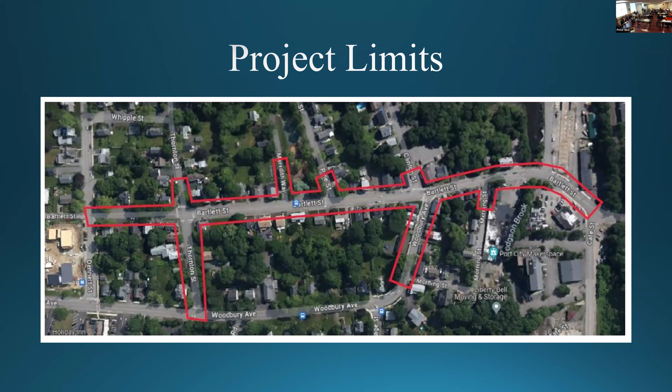So how did we get here? Many of you have been involved in this from the start. First off, we identified some needed upgrades in the Bartlett Street area. Then we had multiple public input meetings where we got your input on how you'd like to see your neighborhood come forward as part of this project. We had three input meetings, and we did have some traffic calming trials last summer. Then we took those and went to final design, went out to bid in February, and here we are ready for construction starting in the spring of this year.

Project overview: this project's main purpose is to replace the underground utilities—mostly water and sewer. The drain portion is only a small portion of the work because the existing drainage system is in good condition. The extension of the drainage is in order to deal with some sewer separation closer to the Thornton Bartlett Street intersection. Then it transitions into a roadway reconstruction project where we're going to be rebuilding the road and then new sidewalks. The purpose of the new sidewalks is to get back up to our city standards so that we can now plow the city sidewalks.

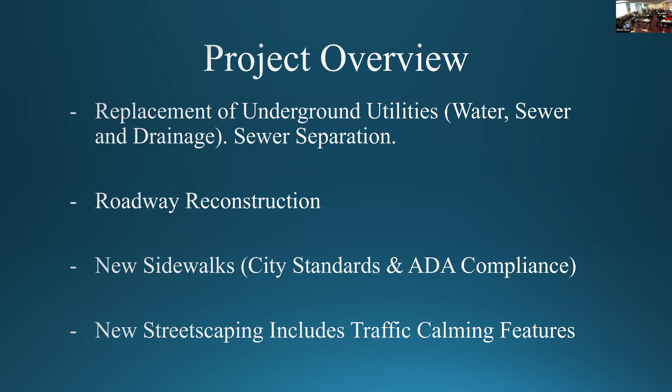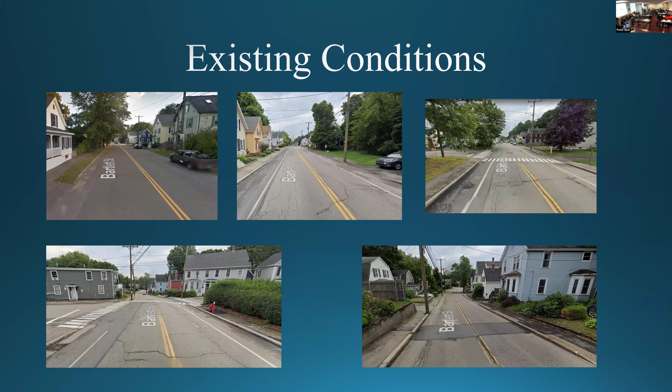So there's just a couple of photos of existing conditions. You all, I'm sure, are aware of what your street looks like, but these show some of the situations I was talking about with the sidewalks, with the fire hydrant in the way so the city plow can't come through and clear snow there. There are some areas of poor drainage, things like that. So those are the existing conditions of Bartlett Street, and this next one is Thornton as well—it's very wide, with some drainage concerns there.

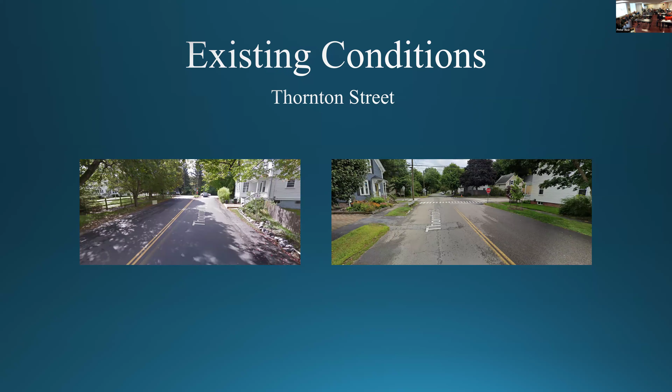As we've presented multiple times, our proposal and what the design ultimately became is narrowing up the street, as part of one of the features for traffic calming, to 32-foot wide, and allowing parking on both sides. This allows for essentially a 16-foot travel lane when there's two vehicles parked, and then you have the self-regulating alternating traffic that will help slow things down. In this scenario, we also have sidewalks on both sides.

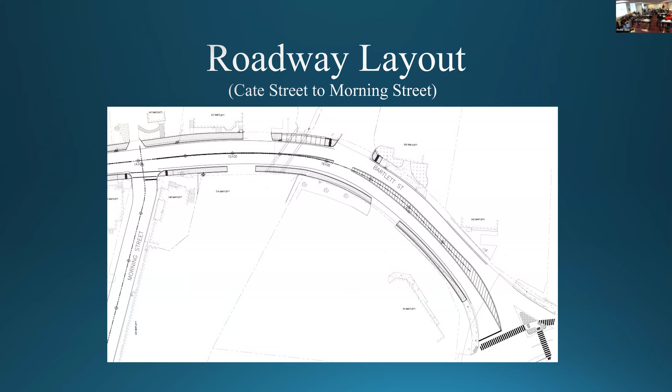These next few slides are just going through what's on the paper, the roadway layout from Cate Street to Morning Street, where we're extending the sidewalk, which currently is just a cow path through this area. Actually, there's no sidewalk, so we're widening the sidewalk in front of the auto repair shop, bringing it through so it's continuous on this side of the street. That's pretty much it for this area, there's no underground utilities there.

From Pine Street to Thornton, what we've installed as another traffic calming feature is the crosswalk at Pine Street. We're narrowing that section with bump outs to 20 feet wide, and the crosswalk itself will be a raised crosswalk, essentially a speed bump at that location. Similarly at the next intersection with Thornton, the road goes from 32-foot down to 26-foot wide at the intersection to help throttle that down and slow down traffic at the intersection. That intersection itself, which I'll talk about in another slide, still has some options for additional traffic calming that have to be decided on.

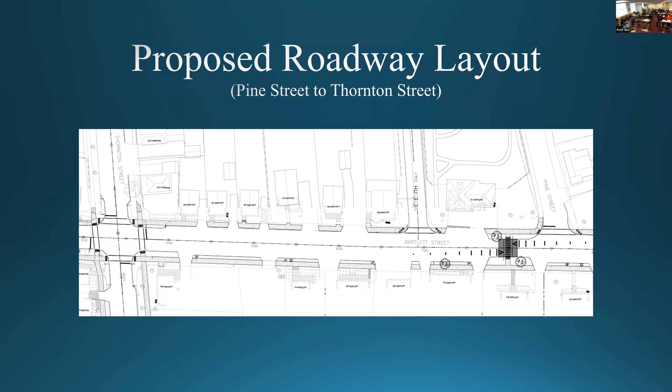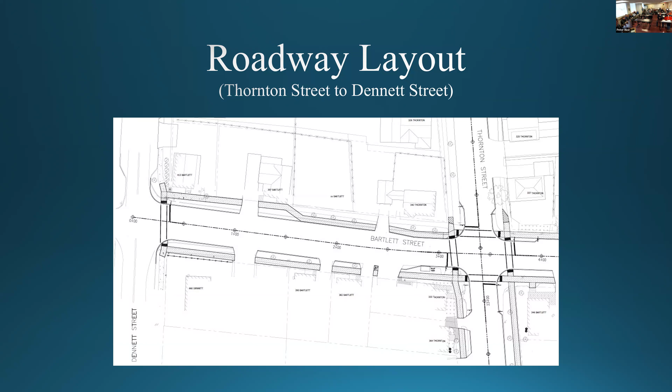Thornton to Dennett Street, very similar, 26-foot wide, then going back out to 32-foot wide to have street parking in that area, again to help with sight lines, throttle down that intersection so that people aren't just coming down Thornton Street and making that right-hand turn, because it's so wide open it's so easy to make a turn like that.

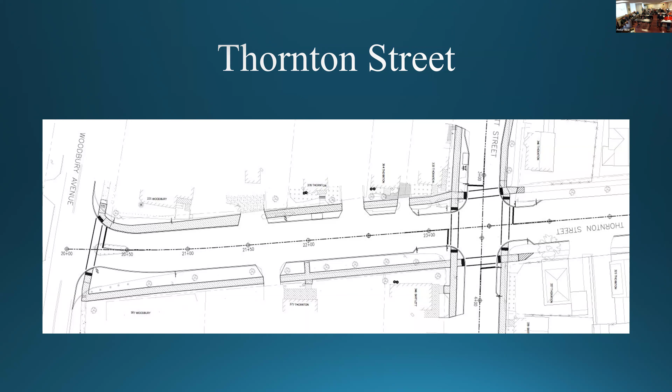This is the still-to-be-determined traffic calming feature at the intersection of Thornton and Bartlett Street. In this scenario, which we put in as an add-alt, we'd be putting in a raised intersection with a two-way stop, so Bartlett Street would not have the stop signs, Thornton Street would. That will be going to PTS for discussions and approval in the future. This is most likely our preferred choice instead of the four-way stop, but it has to get approved before we can execute that at all.

Now we're going to talk about time frame, how the construction process is going to go. For the first stage, we're looking at construction starting near the Hodgdon Brook area up to about Pine Street, give or take. That utility work will be the first stage, then it'll go into the second stage from Pine Street to Dennett. In each of these stages, it'll look like we're digging in the same spot multiple times, because the way utility work is done, we start with the lowest utility first, which will be sewer. We'll come through and do the sewer main, then come back and do the water main from start to finish, and then drainage start to finish. We'll be coming back and forth multiple times, and then we'll tie into all the services at the end of each one.

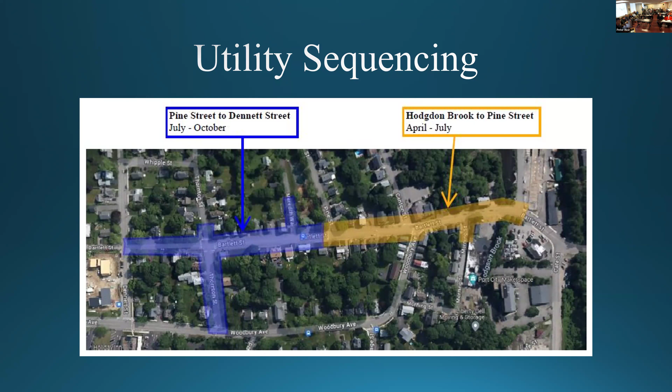After utility work happens, then we get to put the street back together. That'll be kind of the same phase sequencing, starting in this area and then going to this area. So generally speaking, utility work's going to be going on in this area in July through October, and in this area the street's going to start getting put back together, working our way up. I believe they'll have a second crew come on around that July, August timeframe to start putting the street back together.

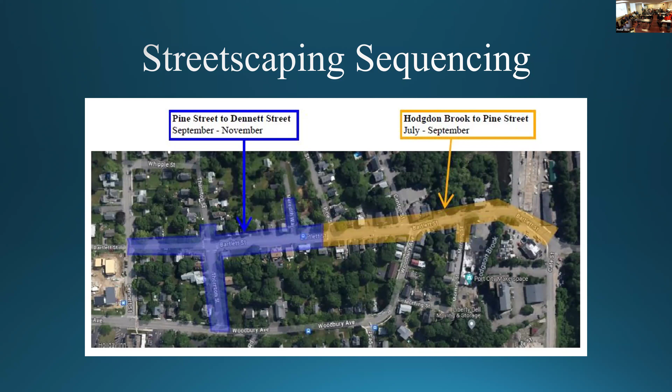Utility connections: one of the first things we're going to do is request access to basements to identify where your utilities are coming out, the depth, size, piping, and especially to identify if you've got galvanized water services. That's one of the first things we want to identify, so it's highly recommended that if you do have a galvanized water service, it gets replaced with the industry standard of copper.

These water lines were put in in the 20s, give or take, and they're really right at the end of their life expectancy. If you have a pipe going through your basement wall with threaded connections like the ones shown on screen, that's a galvanized steel water line, and they rot from the inside out. You don't even know your pipe's about to blow out until it happens, and then you have no water and have to hire somebody to dig a gigantic hole in the street, and it's not cheap. So if you have a pipe like that, let us know sooner rather than later. Go downstairs, look at where your water meter is in the basement, and check the pipe between the water meter and the foundation wall. If it has threaded connections, please reach out to us.

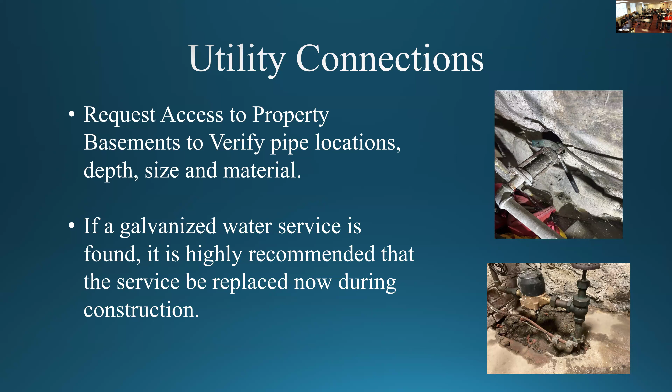On top of that, some more information on your utility connections or services to your houses: each of the utilities - water, sewer, drainage - we will be replacing essentially from the main to the property line or backside of the sidewalk, give or take, since they're very close to pretty much the same location. That's part of the scope of work the city's undertaking as part of this project, from the main to the property line.

And drain services, which is a new thing for this area since I don't think anybody really has drain connections, are going to be put in to the property line as well. This is to pick up sump pumps, gutters, things of that nature - things that you should not be putting into the septic or the sewer pipe. Once those get installed to the property line, you'll be able to connect into them. You'll just need to contact the city and get a permit for that connection, but the idea is to get all that surface runoff, sump pumps and things like that, utilizing the drain lines and not the sewer.

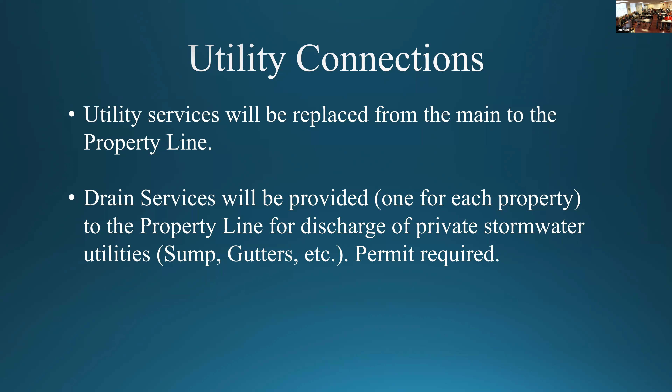The permit is more just for tracking purposes - we just want to know where you put it in, what you're connecting into it, so we have a good account of what's up. Those will be capped, and it would be your responsibility on the private property side of things. If there are any ponding issues, these are great for resolving those kinds of existing issues before we go into the sewer, just going into the street.

We'll work with each of you on your individual property locations, because typically what we like to do on a drain lateral is find the lowest point of your property and come in at that corner, but that may not be the most appropriate corner for you. Maybe your sump pump discharge is on the other side and your roof leader or gutter system is on the other side, so we'll work with you to get the proper location that works best for you. This is just a pictorial of what we discussed here with the typical water service, water main.

This is where the property line is, and generally in that area is the water shutoff. This is what we're going to be replacing. If we identify that this section here is galvanized, we're going to highly recommend that you replace that sooner rather than later, because from there on would be your responsibility.

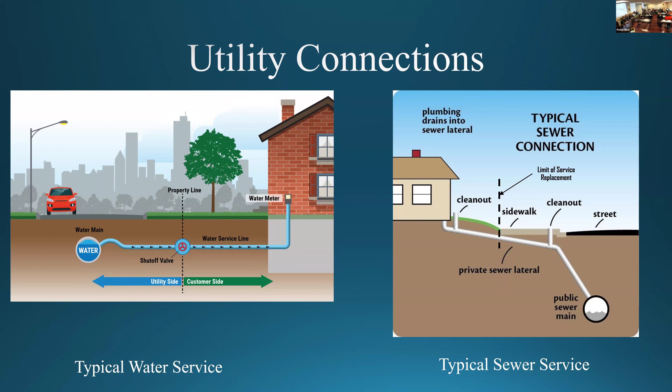Similarly, this sewer main connection here, there's the main. We're going to come up right here, give or take, is the property line about on the back of the sidewalk. So we're going to be replacing from this point to the main. We'll have a clean out so we can do our testing, but you would be responsible for anything from this point to the house.

Okay, so the other concern is access during construction. Some of the locations, especially between the brook and Woodbury Ave, because it's so tight, the road there is only 24 feet wide. Most likely we're going to end up having to do some kind of a detour or something like that. So access to properties will have to be dealt with on a day-to-day basis.

So we have to provide access obviously to your property throughout the day. However, there may be times that getting your car into your driveway is not going to be possible. We'll have whatever main we're working on cut right in front of your driveway, and we'll work with you to get access. You just have to know that those days you may not get access to put your car in your driveway during the construction period of the day.

Now, we're going to make every effort at the beginning of the day. We know we're going from here to here, this 100 feet, and we know we're going to affect these couple of driveways, so we'll contact you, maybe the night before or first thing in the morning before we even start excavating, to let you get out of your driveway. And you'll always be allowed to walk on the sidewalk and get access to your property, but just getting in and out of the driveway may be difficult at times.

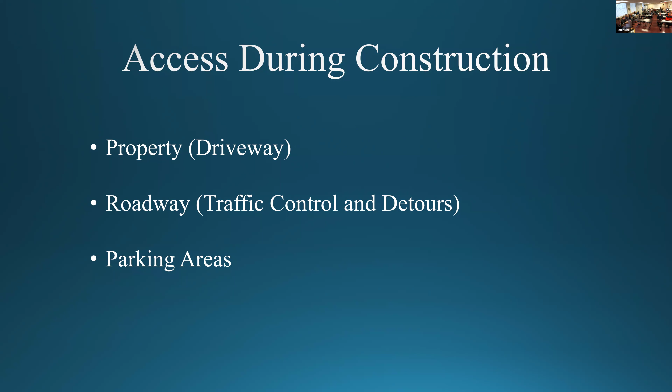There's a lot of information here, but these are public information sources, so we'll have some field personnel. Stephen, he is the city's eyes and ears out there for us. So if you have any questions or concerns while on site, Steve's our guy out there. I will also be out there as well, so if you see me, feel free to grab me. I'll have our contact information on one of the last slides, so you know we're the two main people associated with dealing with public information on this.

Your contact info will be on the website, yes. Personal cell phone number, we can call either one. That's the goal—we have Steve on site full-time, and Mark will be out there as well, but the goal is to make sure our communication lines are open, so we want to make sure we catch things before they become a real problem.

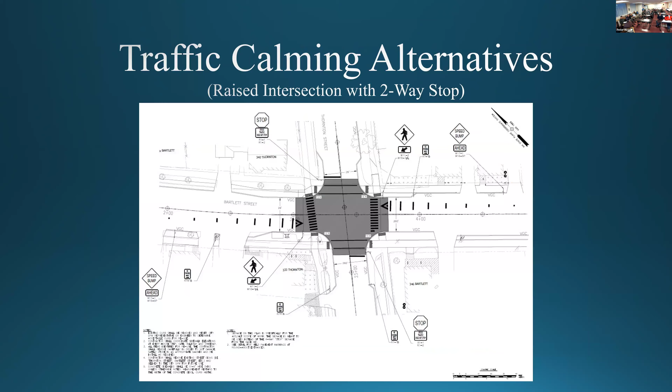Theoretically, small cars - maybe if you've got two minis - they can fit through there and go by very, very slowly. But generally speaking, with larger sized vehicles, if you see somebody coming, you've got the two cars to deal with.

Just like Cabot Street, just like Lincoln Ave. Is it Aldrich? Aldrich is fairly similar - oh wait, no, Aldrich is wider and dedicated, they've got a dedicated lane. It's sort of like that, right? Cabot's like that too, yes, in those scenarios. Richards - oh, Richards, much narrower.

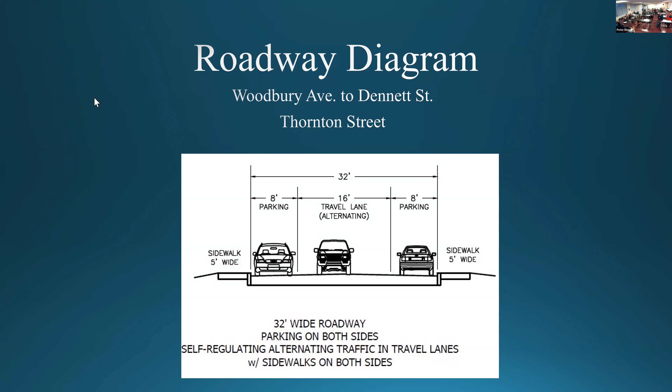Hi, Teresa. Can you hear me? Yes. Okay. Teresa Hill, I live at the corner of Bartlett and Thornton.

My question is, I cannot wait to talk to you guys about sewer and water and drainage and the sidewalk that's going to be moved at the intersection. But I'm going to say one more time, we need a 4-way stop sign. Now, it may be that after all this traffic calming and the raised walk at the park and all the other things we're doing, that we may need to get rid of them. But I think it should be the default, because I truly think more trees, more sidewalks, more calming is going to make that a reasonable intersection.

Okay, pick up. So, okay, thank you. The comment was about a four-way stop - we didn't hear the last word of her sentence, that's fine. No worries.